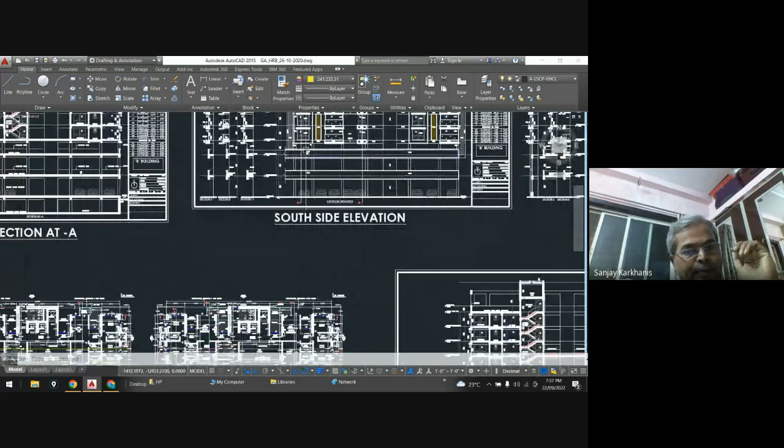Okay. Now the first thing is that we have to find out this zero. Now these are sections with respect to this. You can check over here. So this is section 1-1. So if you cut the section of the building and want to see, you can see this is section 1. So whatever is in this section will appear over here, right? Now let us see that in the window.

Let's see in this window, which is marked as W1. You will see 0.00, and if you see this, this small band is minus 1.5. That means it is away from you, up to a distance of 1.5. And if you see this chajja marked over here, it is plus 0.45. That means it is towards you. So anything plus is towards you, and anything minus will be away from you with respect to this 0 0 line. Clear?

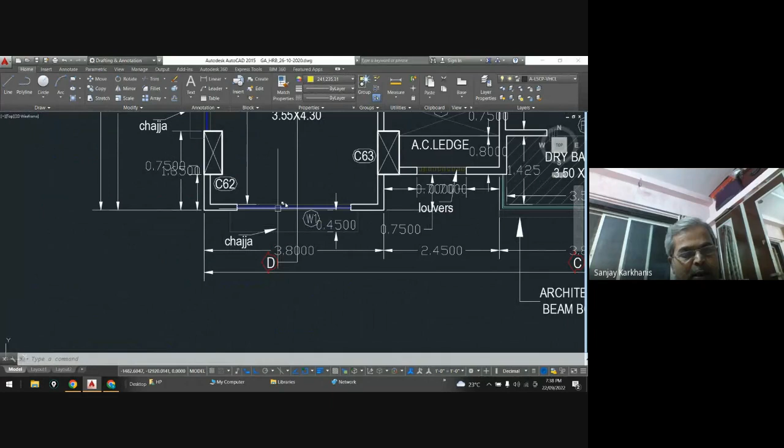Now nothing is mentioned over here; it's not actually written. So you can see that this is the 0 0 line. So what you have to do, you have to go to this W1. Okay, you can see that this is W1. Then I will draw a line like this. Got it? That means this yellow line will indicate the 0 level because it is at W1. Then this chajja.

So in plan, this chajja has a dimension like this, and if you measure the length of the chajja, it is something like 2700. One minute, I'm having a little bit of trouble. Just wait one minute.

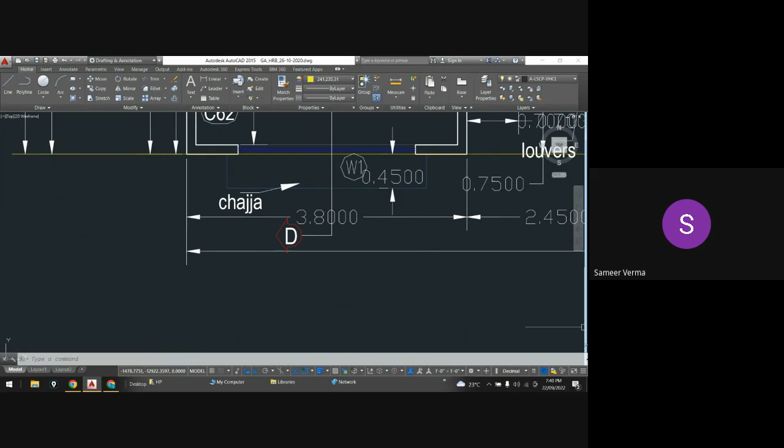Okay, so I'm coming back. So this much is the length, 2700. That means 2.7, and then I will try to see the elevation, and let's see over here. Yeah, actually, sir, the drawing is not that clear, that is why I am discussing. Is it visible now? Yes, it's visible now. Don't worry, I will use it.

You can see this is your chajja. So I will try to see whether the dimension on the plan and dimension on the elevation matches. So you can see it is matching, right? Yes sir. That means this is the chajja, which is having 2.7 meter as its length. That means offset from this window, maybe 150 on right side, 150 on left side. Then this will be thickness of the chajja, or height of the chajja slab, and it will be projecting towards you with 0.45.

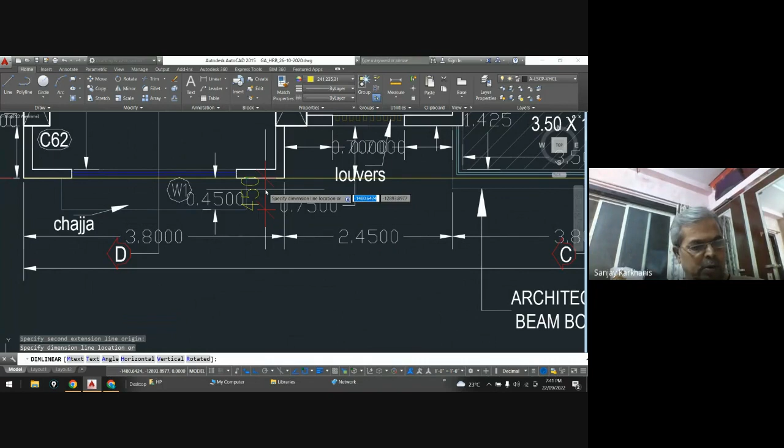And the same thing you can get in the drawing also. Let's see, you can check it over here. So if I measure this length, it is 450, right? Yes sir. So this is how you can find out the relation. Now one thing is confirmed, that whatever zero line he is saying and we are saying is one and the same. And then we'll start reading the elevation. And if we do not get enough information from the elevation, we'll try to see the section, let's say section 1. So section 1 is shown over here.

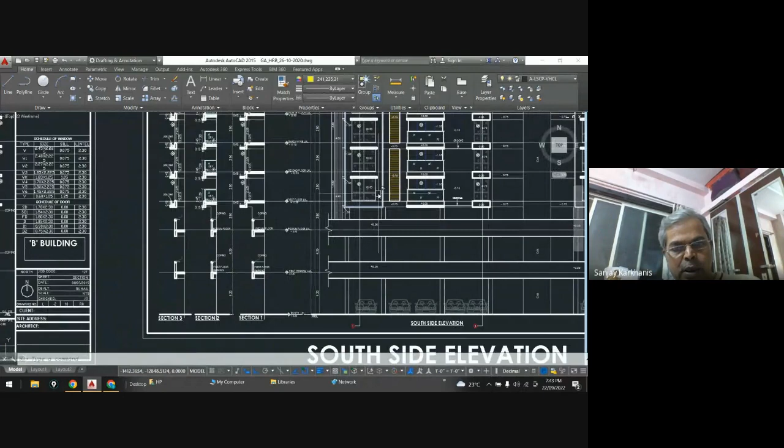And then if you come to this podium, this is the level, right? So you can see that this is the window and this is the projection 0.45. So if I look from this direction, that means the south direction, I will get 0.45 plus, right? Clear? Yes sir. So along with the section and the elevation, you will see that this box is at the zero line. Then this box is towards you by 0.45, and this small box is minus 1.5.

So if I go back in the plan, I will try to measure that and find out what is that projection. So you can see this is your louvers line. So what I will call it is an opening and AC ledge. And if I look from this side, I will see these louvers. Then I will see this much distance. So that is the distance.

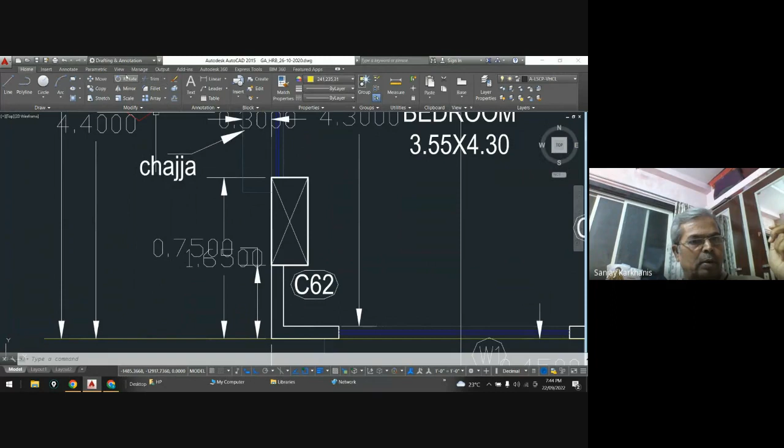So if I measure that from this line up to this point, you will see it is 3.8. That means that is not the line that he is showing. It is something around 1.5, so this is the line. Are you getting it? So if I measure that linearly from this point to this point, you can see 1.498. So there may be a little bit of error in my clicking the point. Okay, see 1.49, almost 1.5, right? And it is away from this yellow line, and that's why you see this projection, a chajja projection which is 1.5. Clear?

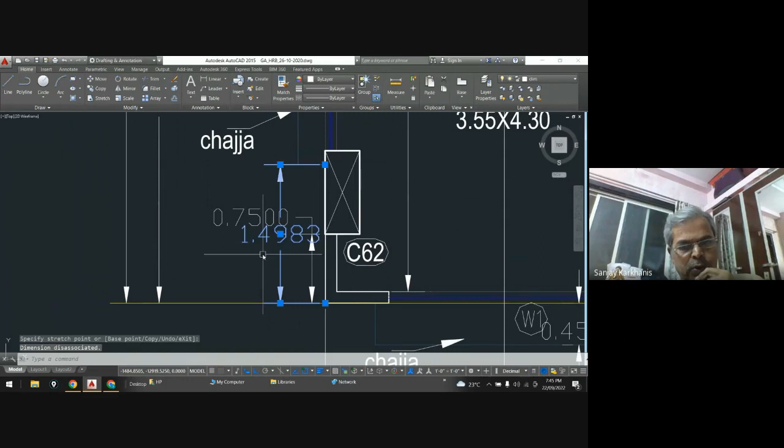Hello. Yes, sir. Or let's see, this is 1.85. If I draw this line on this point, you can see 1.4983. So that's a dimensional measurement mistake, maybe. So it is actually 1.5. Okay. Let me draw it. Clear? Yes, sir.

Then I will see this louver, and then I will see this band, and the same thing you can check in the elevation. Where is that elevation? Okay, so here we are. See, this is minus 1.5. So for first floor, it is minus 1.5, then this louver, and then this width. So now you can understand what this is. So these are the louvers. This is the chajja projection that is away from the 0,0 line at minus 1.5. And this was that projection 3.8. Clear?

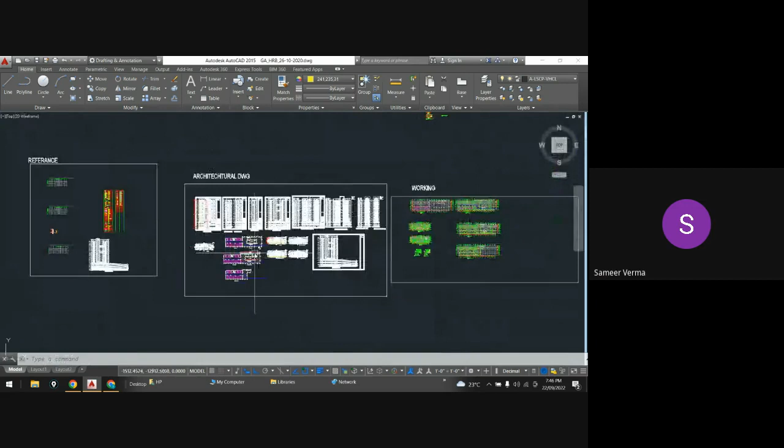Clear, sir. Yeah, you can check it over here also. We have measured that. So it was this distance, up to this. This was the 3.8 meter. Okay.

And in this region, I can see only that, because whatever is back, I cannot see it from this south side. Similarly, you can check this thing. Now here also there are louvers, then this is a column.

So if you check the projection for that, it is 0.75. Then louvers, and then this will be a 0,0 line, and then you will see architectural projection for beam bottom. So this is the architectural projection at beam bottom, and you can verify it in the elevation also. See, after this window, you can see this.

So these louvers are at minus 75 or 750mm, or 0.75 from the 0,0 line. Then this projection, if you see this projection, so again this projection will be 0. So anything not mentioned must be a 0,0 projection. Okay, clear? So this is the column part that you see in the plan.

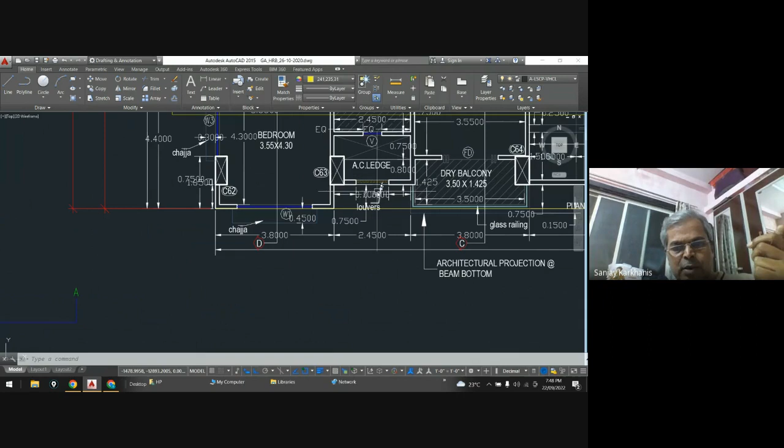See, so this is the column part. You can check it this much. So total distance you can check, then louvers, size of the louvers, and then if you come to this dry balcony, again from this 0,0 line, now you must see the grill, that glass railing that the architect has proposed.

So this is the glass railing, right? And then there will be a folded door that you can see from this side. And if you have any doubt, then again he has shown you a section, that is cutting a section line CC. So you can check it in section CC also, or in section C, or you can check it in elevation also. You can see that this is a two line.

So section 3, then similarly there will be a section 2 also, because section 1, section 2, and section 3. So this way you can read the entire drawing. You can check it over here. So this is the glass railing, and you can check that below, at the beam bottom, you are having a 0.15 as a bottom chajja. Clear?

Yes, sir. And then you see a part of the folding door, that means this is your dry balcony area, and inside it is 1.55. Then again you can cross check whether whatever you are reading is matching with this.

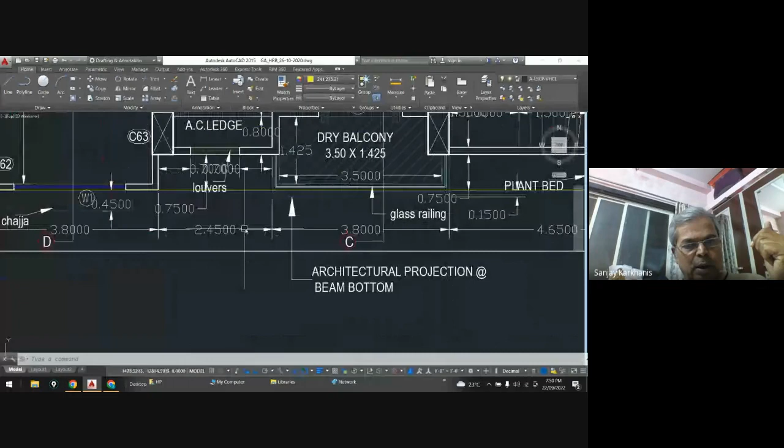Now you can see here. So this is my 0,0 line. Then this is the bottom chajja, which is 0.15. So I can measure and see that it is 0.15. And then from the 0 line I can see the distance of the folding door. So this is the width of the folding door, and this I will see as a brick or BB masonry.

And if I check the distance, it is 1.55. So in elevation you must get it as minus 1.55. So whether you are getting it or not, you can check it. So you can check it over here. So this much part is inside, okay, or away from you at a distance of 1.55. Clear?

Yes sir. So similarly, you can see at every floor, and then you will understand the entire floor elevation up to every floor level, because every floor level you will see the same thing. So 0.15 chajja below the dry balcony, then this is the 0,0 line. Then again there is a glass railing, then folding door at minus 1.55, and then you can see at minus 750, this is your louvers area, okay, and this will be a 0,0 line.

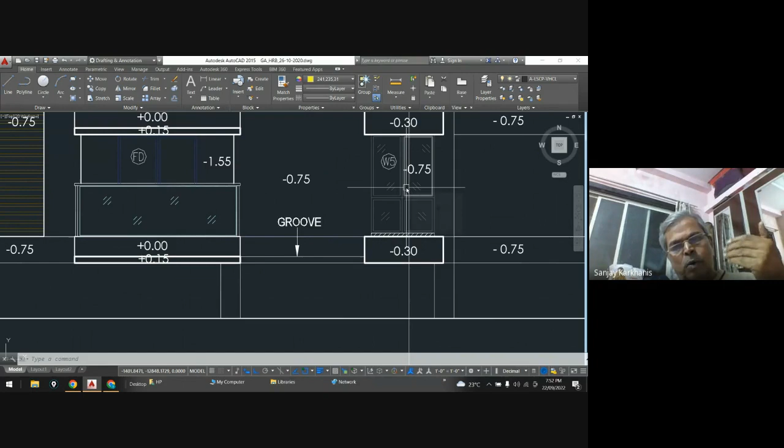Clear, sir. Now let us move to this. So folding door has been understood. Then you can see a groove has been created, and then you are having a window 5, which is away from that 0,0 line at a distance of 0.75 meters, and below you will have this projection as minus 0.30, meaning inside that.

Now check it in the elevation. So this is that distance. So this is your W. Where is the W5? Okay. This is a W6, and this is your line.

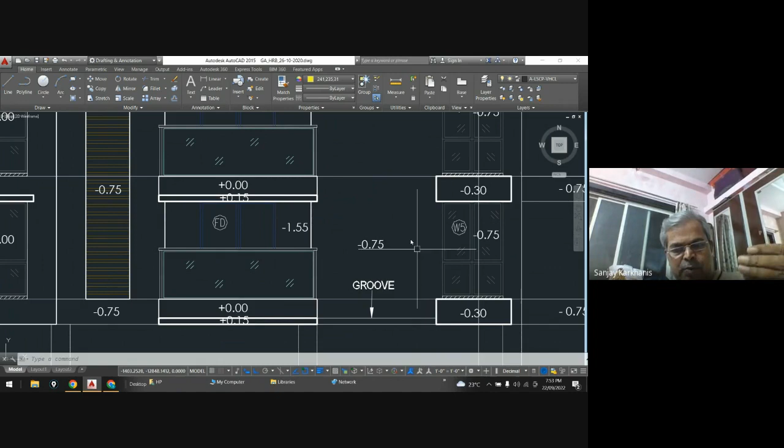You can see that minus 75, because from the 0,0 line the staircase is inside, and this is W6. While he is showing, what is showing here? W5. Actually, this should be W6, because some minor corrections may be there, and then this is minus 30. That means minus 30 and minus 75, so from this line it is towards you at 0.45.

Clear? So the same thing you can check in your plan, and you can see this 0.45. So this was the chajja. So here in plan he is saying W6, but in elevation he is saying W5. That may be some mismatch, and you can find out, right?

Okay, if I measure this much distance, it should be 0.3. Let me just check it. I'm measuring it from this point to this point, and it is 300. So that means whatever elevation you see over here is correct.

See, this is minus 0.75. From minus 0.75, it is minus 0.3. That means plus 45 from this line, W5. Or you may say from 0, 0, it is minus 30. Clear?

Yes, sir. And then you can see this additional part, so this is your column. You're having a column over here, and this is at minus 75, and the same is the column, and you can check that area.

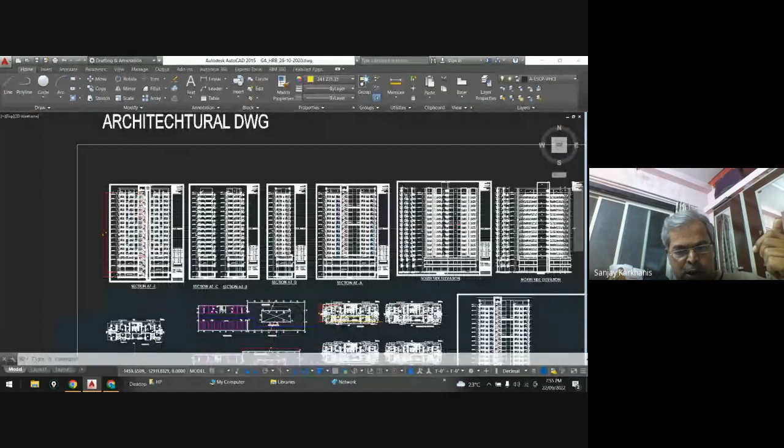So in plan also you can go and see. This is that C66 column, and this is from the yellow line. It is at a distance of 0.75 meters. You can check it over here. The measurement is also shown, and if it is not shown, you can measure it, so that your idea about the sections will get clear.

Now you can see again W1, and 0.45 is the projection of the Chajja. So this will be 0.45, W1, which is at 0,0, and that is a bedroom, and you can check it in elevation. So south side elevation. So we are here.

You can check that this is 0, 0. Then this portion is 0.45. So from 0, 0, you are inside. Then this is also a 0, 0 line, and you can check that inside it is 0.75 in minus direction, and then it is repeated. So whatever is over here, the same thing is over here. Clear?

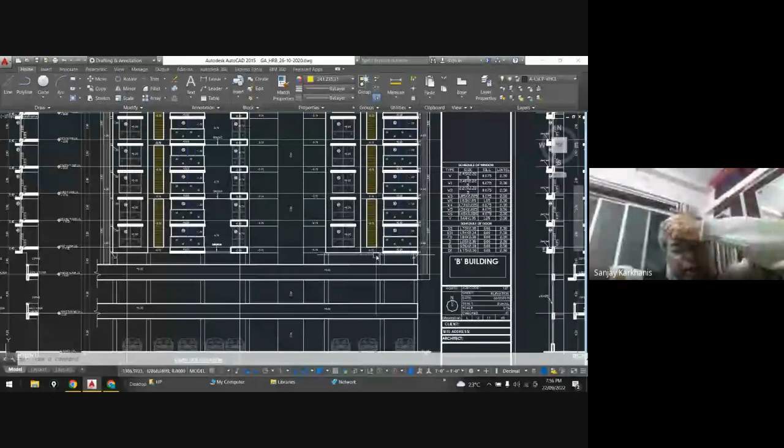Yes, sir, have you understood the south side elevation? Yes, sir. And then you can check the refuge area at that proper floor.

If you go to this floor level plan, you will see a refuge area which is at this much, and this is the height for the refuge area. He is creating something, maybe a railing or maybe BB masonry, whatever in plan.

So in refuge area, you can check it. This is that refuge area, and that refuge area is away from the 0, 0 line. Now you can see that the 0, 0 line you are having at this level. So away from that is 0.75. Then you can check this and everything. So this is how you can check a south side elevation.

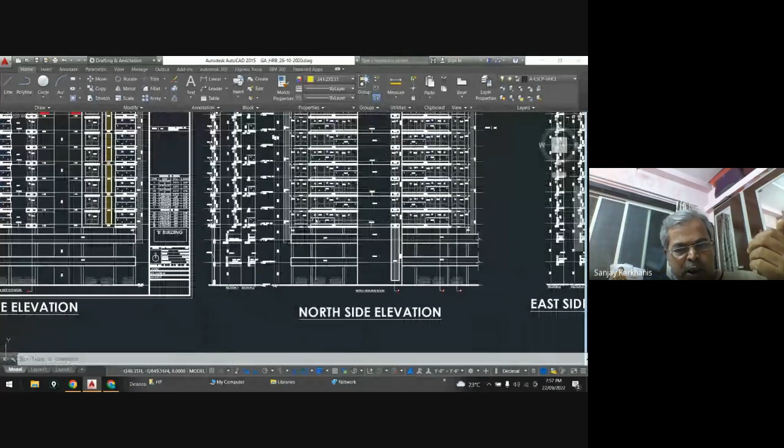Now try to see another elevation, let's say we'll go to the north side. Now north side, just have a look over here, and you will find it a little bit complicated. But if you go one by one, you will understand. The first thing is that you have to find out which one is the 0, 0 line.

Okay, so I can check it over here. Let's say this is the W, so this is W5, then this is a sliding door, then this is W2. So all these lines are at 0, 0. So I will go to the north side, that means opposite of south. So I will check it over here and try to find out.

Okay, so you can see that this is your W6, then this is 0.75. Then you can mark the 0, 0 line as this line. Okay, so I will say that the 0, 0 line will be something from this line.

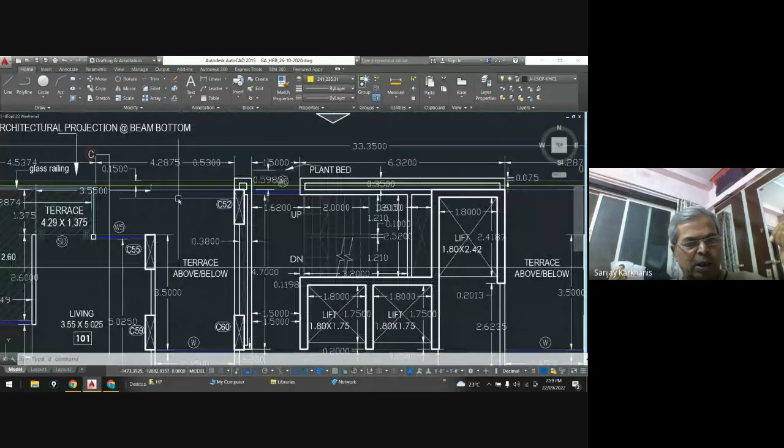If you see whatever dimensions you are getting, if it is not matching with that, then you have to check whether your zero zero line is correct or not. Now I have just drawn a line, as according to me this should be a zero zero line.

And now if I look from this side over here, let's say this is W1, and if I check the dimension, it has to be 1.5 something, and then this will be 0, 0. That means this portion will be plus 1.5. Clear?

Yes. See, now I'm looking from this side, so anything plus will be towards me and anything minus will be away from me. See, he has shown how you should see the north side. So if you are standing over here and you are looking at the building, you will see this.

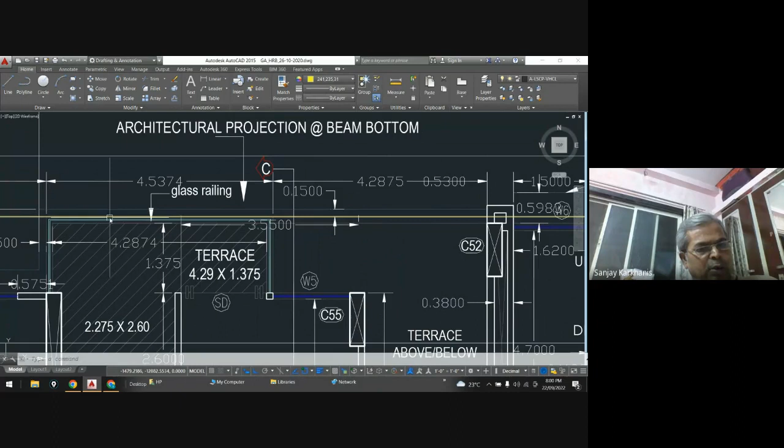Now the first thing is to check this much distance so that your zero zero line will get confirmed, or you can check this railing also. So according to this plan, and whatever that yellow line that you are defining, this is the terrace level, and that glass railing should be at 0, 0.

So just check in the north side elevation, so south side elevation, and this is my north side elevation. And you can see this, where is that? Yes, W1 is at 0, 0.

Then this will be 0.45, and after that this has to be 0.75, and this distance, you're not getting yet clear, north side elevation. Okay, from 0, 0 you can see this portion, which is a portion of the staircase, is 1.725. Okay, so check in the plan.

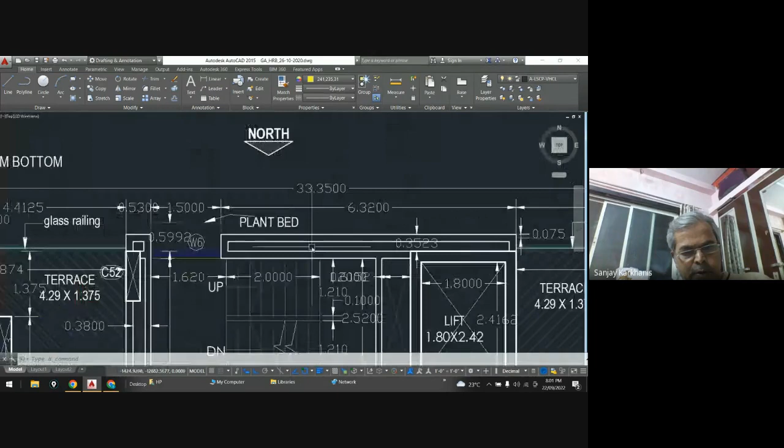So this is the portion. Okay, and if I see this portion, it has to be at 1.725.

Actually it is coming out to be 1.65. That means your portion is somewhere here. Yes, 1.725. That is, Yes, sir. So that means your 0-0 line is not at this.

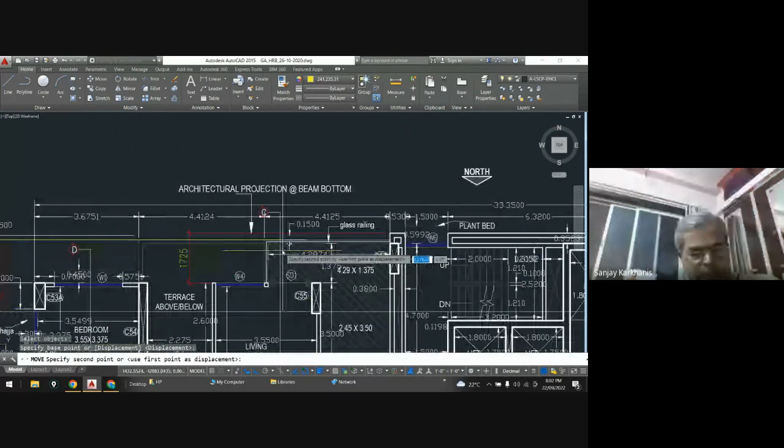It is a 0-0 line. Let me move the 0-0 line with this up to say this. So that will be my 0-0 line.

Clear? Clear, sir. See W4 and W1 are inside at a distance of 1.725. That means this is my 0-0 line. Yes.

Move the line. Move the line up to this. This is my 0-0 line. Clear? Yes, sir. That means this sliding door must be at 0-0.

Then it will be plus 1.725. What he has written? Sir, yeah, one plus. Yes. You can see here plus 1.725, right? Yes, sir. So accordingly, now you can get the relevant drawing.

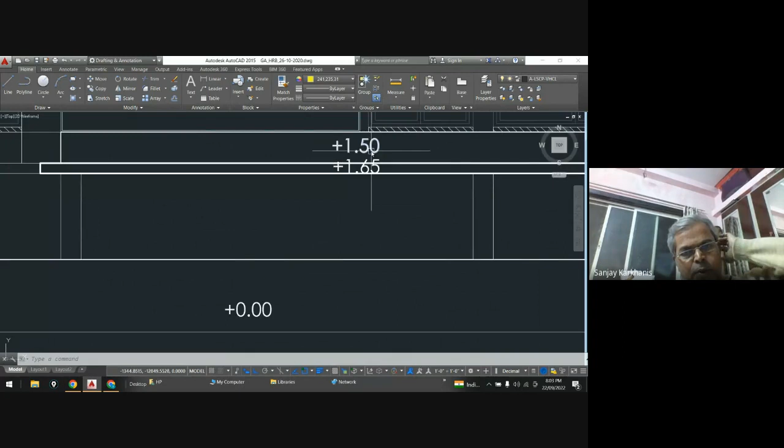See, it is 1.5, then 1.65. So now you can get it from this 0-0 line. So again, you can check it over here that sliding and W2 are all at 0-0. And you are having this grill portion as 1.5, and similarly this also 1.5 and this as 1.65. Now you can see that over here.

So from this, this is your grill part, which you can check it at 1.5, right? Yes, clear. Yes, sir. Yes, sir. So this is how you will visualize the entire thing, and then you can check this W2 also, which is

at 2.6 inside, that means minus 2.6, and that you can check it over here. So it has to be 2.6. This line, where is that? See this minus 2.6. Yes, and that's why this is L type.

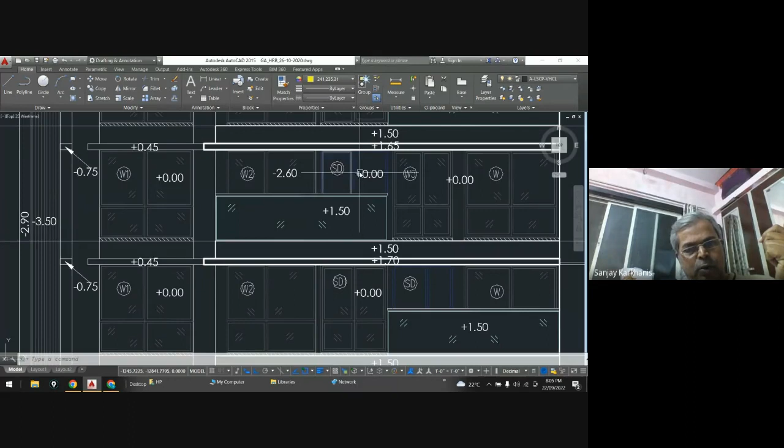So the sliding door, and this is minus. That means you can check it over here. So where is that sliding door? So this is a sliding door, and this W2. So W4 and W2 are away from each other at a distance of 2.6. Clear?

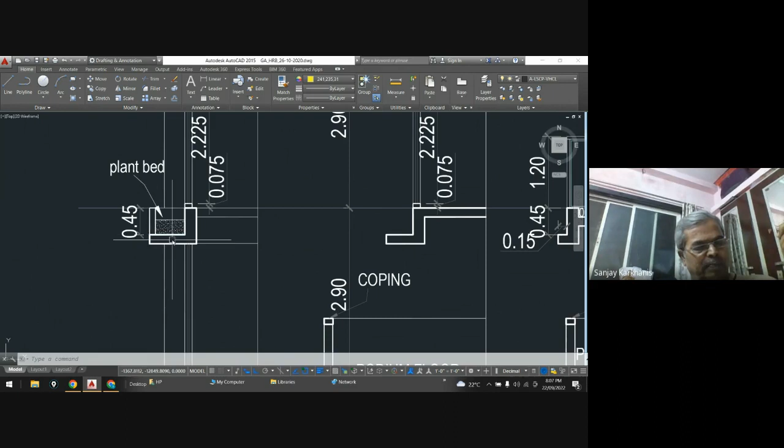And then once the architectural features are missed from your RC drawing, then those drawings, whether they are technically correct from a strength point of view, they are of no use to a client. Are you getting that point?

Yes sir. Because many times we are mostly talking about bending moment, shear force, torsional force, flexural moment, torsional moment, deflection criteria, but we are not paying enough attention to create the architectural features.

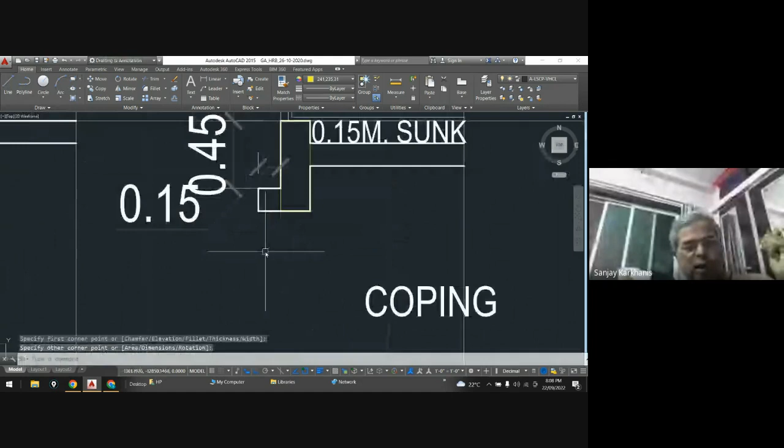And then your drawing may be technically very best, but for the client it is of no use, because let's say if I create a beam like this, and this concreting at this floor has been completed, and later on

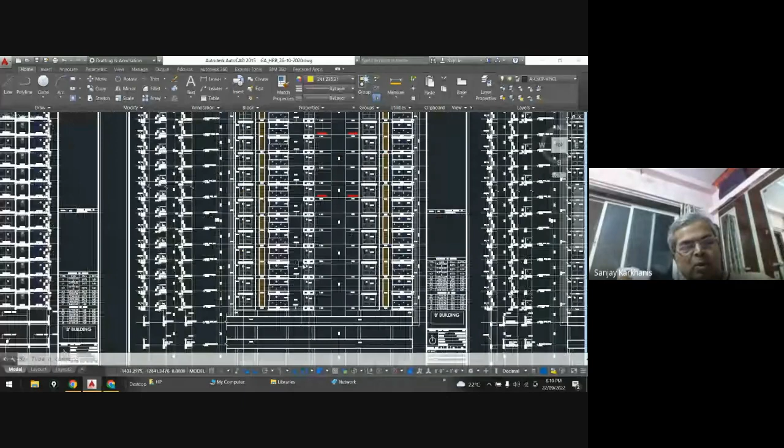Otherwise, the elegance or beauty of the structure will be hampered. It has nothing to do with architectural, but these are very important points on which I have found many structure engineers do not focus. And later on, the blame game starts.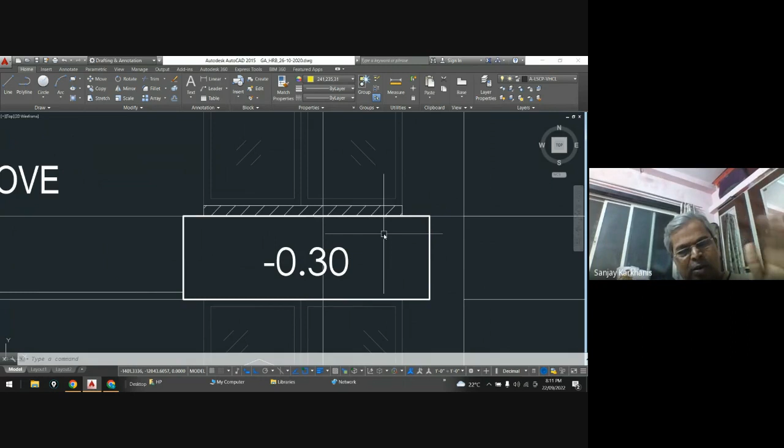How will you add these projections once your floor level concreting is completed? Yes, sir. तो फिर वो वापस शुरू होता है ना, repairing and all that, but that looks ugly, and that is a sign of not having a concentration on your project, and that is very important. And once you become a master of this, then you will be at your top level.

So these are the things you have to take into consideration. Right in the beginning of creating your GA drawings, you will see that everywhere we have provided that. In our GA drawing, we have provided all that. You can check it anywhere. Or there may be some issues where you may not create proper GA, then you have to address it with your architect and get it corrected from your angle, or you correct your drawings as per the architectural angle, right?

In GA drawing, everywhere we have provided all those features that the architect wants, right in the beginning. At the time of concreting, it will be taken care of, so the site person does not have to superimpose your drawing on the architectural drawing and go ahead with that. They are not of that type of excellency.

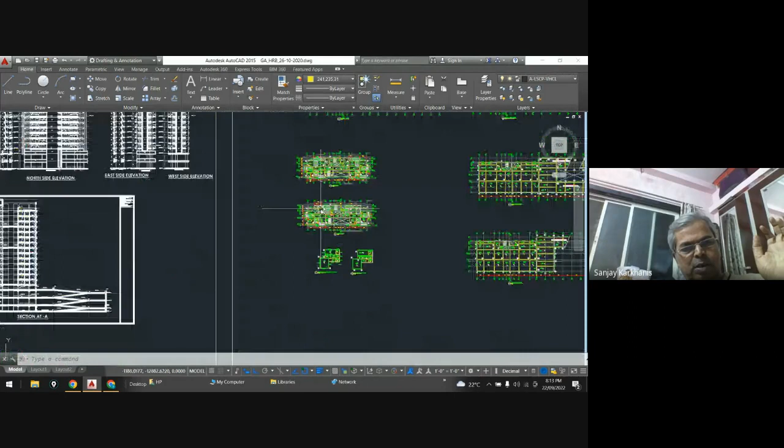That's why understanding the architectural features is a very important part before creating your structure. And now here you will see that the depth of the beam is finalized. You can take 1 or 2 days to understand every feature of the architectural drawing. And even if you do not understand anything in it, you can ask the architect to explain, भैया ये तो मेरे समझ में नहीं आया, आप बता सकते हैं. He will definitely guide you.

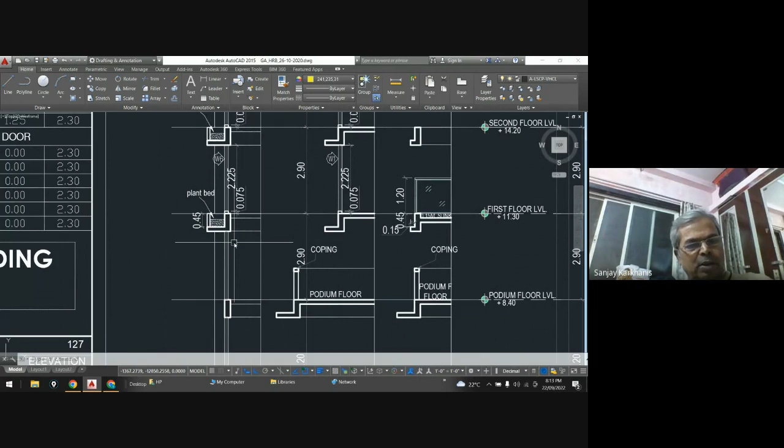And now I will leave you to read the east side and west side elevation. The same way, you have to draw the 0 0 line, and with respect to that 0 0 line you have to see whether you get all these features properly or not. Just have a look. You can see here, this is a feature, and this is that part which is 1.35 towards you from the 0 0 line.

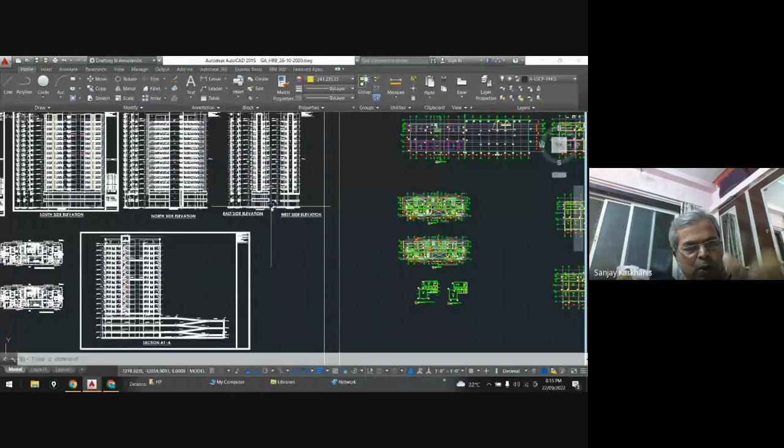You can see the 0 0 line stands at the window, and most of the time the window level or line in plan which shows the window is considered as the 0 0 line. Now you can see this is the portion, this is the architectural elevation, and even with this small width the architect has created a very beautiful looking elevation.

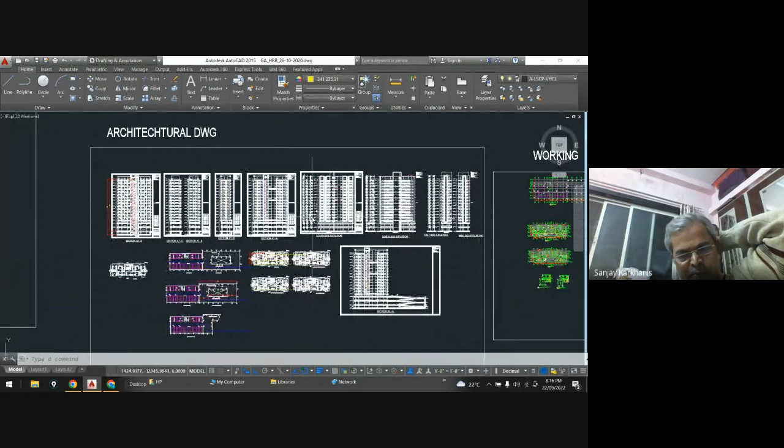Yes, sir. Yeah. So this way you have to go through the architectural drawings. I will mail all this after finishing the session, within 15 minutes. So all these drawings, and don't look into this. This is the thing that has been used for creating the GA drawings. This is a legend, or you may have it for your practice. So all these are the GA drawings.

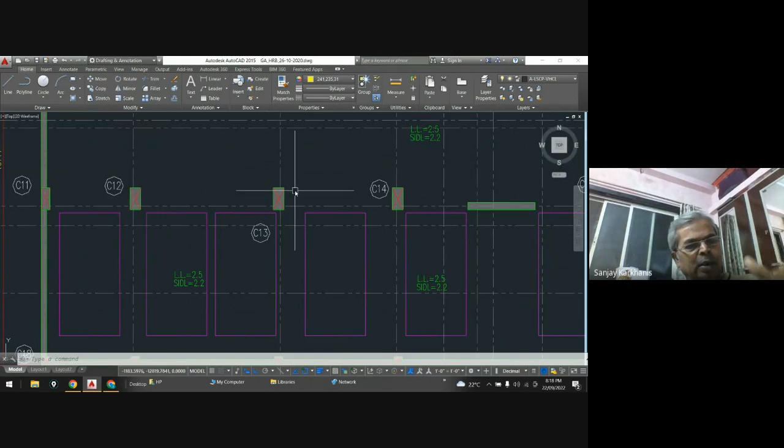Now, after finishing with architectural details and everything, you will create GA drawings, and then your actual work will start. What will be the work later on? Creating the grid lines, then providing the locations of the columns, then you may measure the size of columns and provide it, or you may provide any size and go ahead with your analysis, and based on your analysis results, finally you have to choose these sizes and rectify your model.

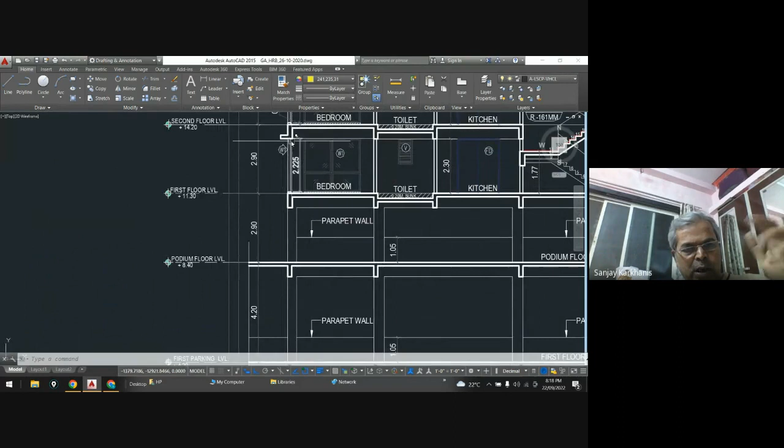But before that, it is very important how you will provide. Now we are not providing anything for this region, which is called a podium, or this is for going to different levels. So you may exclude this part, and you may create the entire model with the help of this. And these are the floor to floor heights. Then you can find out the height of the window. Based on that, you can find out the loading.

Now we have also prepared a loading standard. Right in the beginning, you can see we have placed how much SDL, live load, etc. you should apply on the various floors. All these yellow lines indicate the size of beam, and the depth of the beam you can find out from the elevation. And here we have written for your help the SDL or SIDL and live load, etc. Everywhere we have written, but we have prepared a detailed input DBR. So with respect to this, we'll try to read the input DBR, and that will also help you a lot.

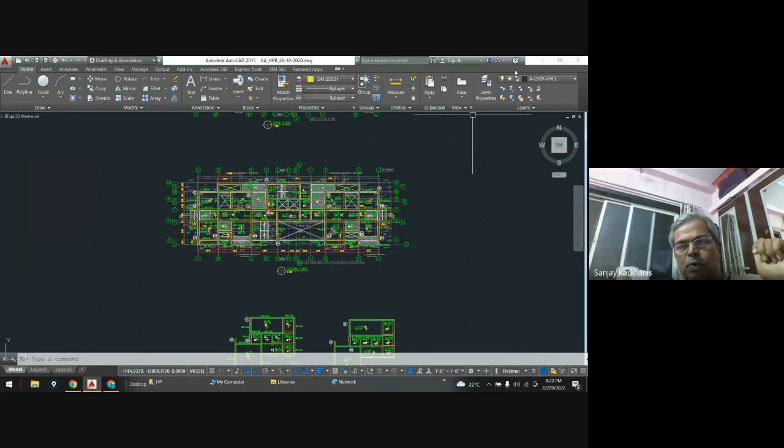Now I will minimize this and we'll go to that input DBR. That input DBR also I will share with you. Let's see that input DBR. So I will go to my platform, then HRB data. So this is the HRB DBR document, and I will click on it. Now you can see 1 of 49. I think I have shown you this, but we have not discussed it. Have I shown you this? Hello? Yes. But we have not discussed it.

Yeah, I have just shown you that this is a standard pro forma that any private consultant's office must have in a format, so that whether you are working on that project or someone else is working simultaneously, or there is a team of engineers, one doing one thing, another doing another thing, there has to be some consistency. And for that, everybody will take help of this input DBR. That's why I say this input DBR is for your company or your consultancy.

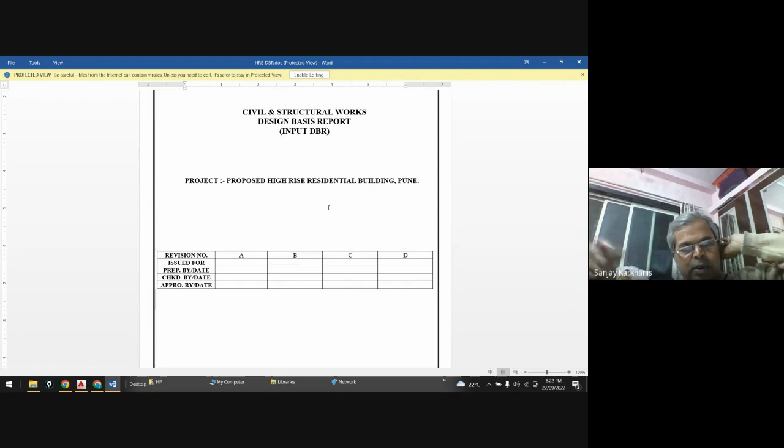Maybe your consultancy may be run single-handedly, or there may be a number of structural engineers. But many times what happens, I will consider SDL as 1.5, while someone else will consider SDL as 1.75, and a third one will say that no, actually SDL has to be 1.25. So there will always be a difference.

So we should not have that difference, and that's why this will be a standard practice. And with the help of this DBR, you will say that whatever ETABS model you are creating, this is your base, and that's why it is called a design basis report.

Okay. Hello. Yes, sir. Yes, sir.

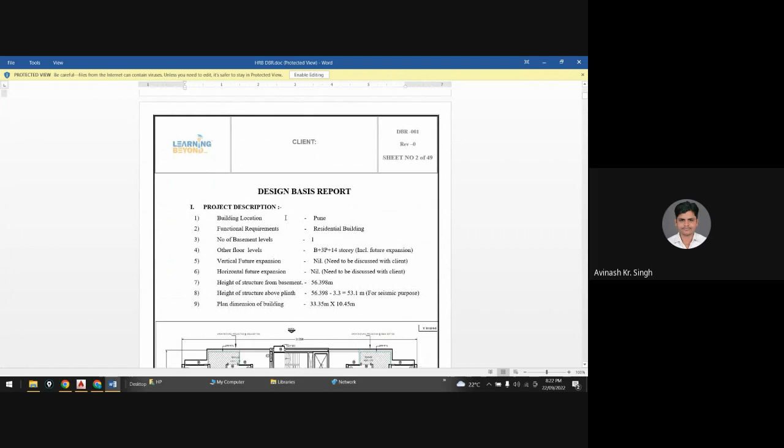Now this format will also be given to you, and you can have a Xerox copy of this. The PDF format will be given to you, and you can print it and use it for any other project. The format will be the same, only the dimensions or magnitudes will change. Let's start with that and understand the DBR process.

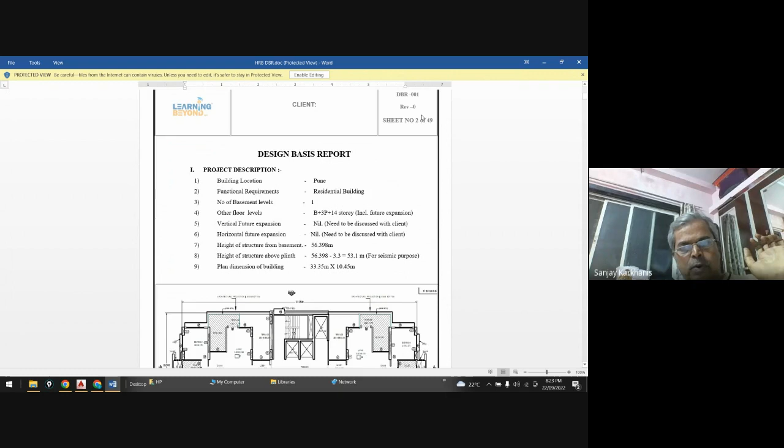So this is a design basis report, sheet number 2. There are 49 total sheets, and you can see in first number you have a project description. Whatever project you are carrying out, a general description of that project you can write here. Building location, this is the place where the building is located. You may have whatever place you have.

Then functional requirement. What are the functional requirements? The building may be commercial, residential, or mixed use. So there may be a hotel at first floor, offices on second, third, fourth, and then residential. So all that you can provide here. Mixed use building, or commercial building. Right now this is a residential building, so we are saying residential building.

How many basements are there? There may be one, two, three. Right now we have only one basement. Then other floor levels. How many other floors are there? So basement plus three parking plus 14 stories above, including future expansion.

Now, many times the building you are creating will depend on the funds available with the construction company or the owner of the project. Depending on that, he may say that actually I have a plan to create 14 stories, and after that I might create two more stories. So based on that, you have to put it here.

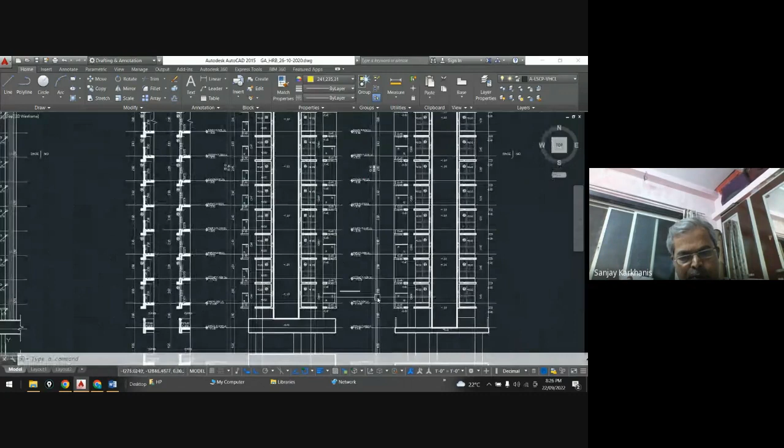So zero is starting at this. You can check the plinth level. Actually, it's not. Is it a plinth level? It has to be. It is to be checked in the sections. So okay, again, this is a mistake. Actually, this zero is at this, and this is that. Let me make it. So this is here, and this is here.

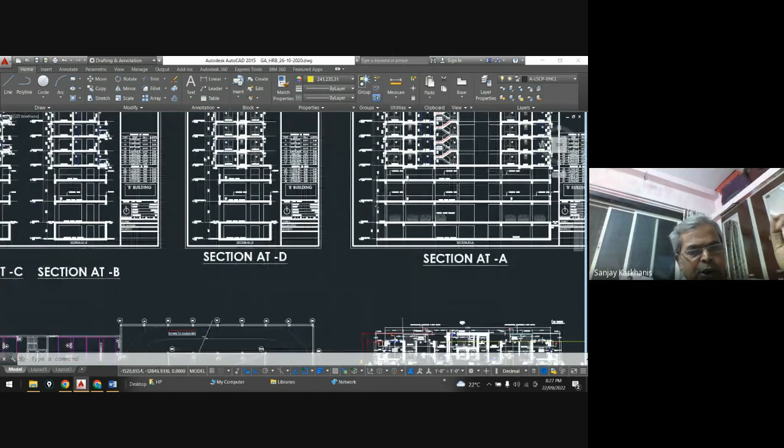Yes, sir. Okay, so let me save it. So this is your 0, 0, which is ground level, and below ground level you have a basement at 3.3. That's why this will be minus 3.3, and then from this will be 4.2. Then 4.2 plus 4.2 will be 8.4. Accordingly, you can check and have the information here, right?

Then height of the structure above plinth, then plan dimensions. You can read the plan dimensions. This is your width and this is your length. The entire length from outer column to outer column. So you can write that: 33.35 by 10.45.

Then you may have a sample picture there for understanding. A typical floor has been shown here. That is the first floor, right? Then now, what type of construction are you going to use?

So the basic material chosen for the structural element in the building is reinforced concrete. If it is PT, then you can say PT. If it is flat slab, then you can say reinforced flat slab with column capitals, etc., whatever. So the description may change, but this second column is for what type of construction you are going to use. Then the building is proposed to be designed as reinforced concrete.

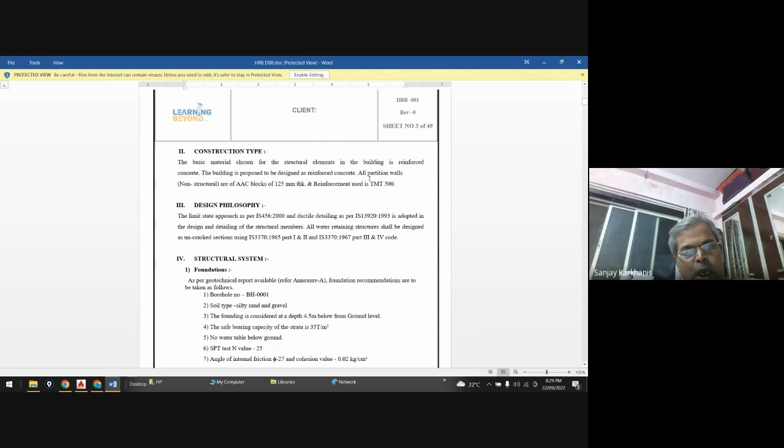All partition walls which are non-structural are of AAC blocks. So these are, what I will say, lightweight density blocks. So internal partition walls are considered as 125 thick AAC blocks, and reinforcement that is used is TMT 500. Okay, then this is about design philosophy. So you are going to use a limit state approach.

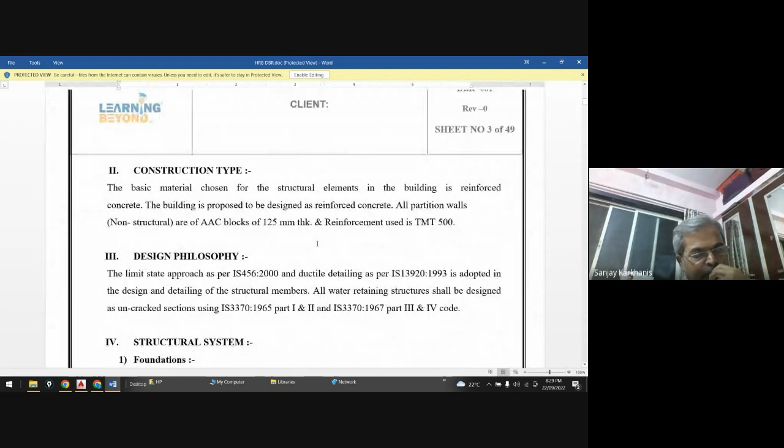Can you see this, or let me increase it? Now you might be able to see this. Yes. Hello. Yes, sir.

So this is a limit state approach as per IS 456 2000, with ductile detailing as per 13920. Now instead of 1993, if you are having a higher version, you can change it a little; when we constructed this, it was 1993. Design and detailing of the structural elements has been carried out as per IS 456 2000 and 13920. Then water retaining structures shall be designed as uncracked sections using IS 3370 parts 1, 2, 3 and 4.

Now, what type of structure system have you suggested? Then the foundation, then the geotechnical report. Whenever you are going for high-rise structures, you must go for a geotechnical report. If you are going to investigate the soil or the supporting ground, you have to go for a geotechnical report, and a geotechnical consultant, or foundation consultant, will come into the picture and give a quotation to the client, which might be around 60-70,000.

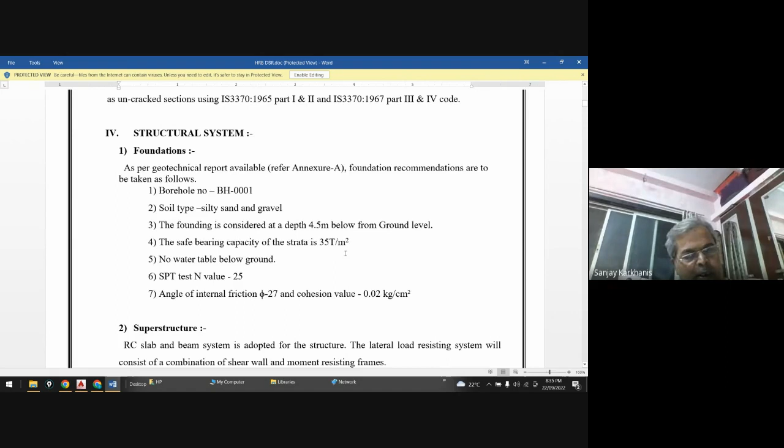And that's why initially we asked the foundation consultant to at least give us the depth, whatever is available, and the SBC of that area. So he has given that. And this will not at all be your responsibility. Ask the client to go for investigation and get the report, right? So that has been mentioned

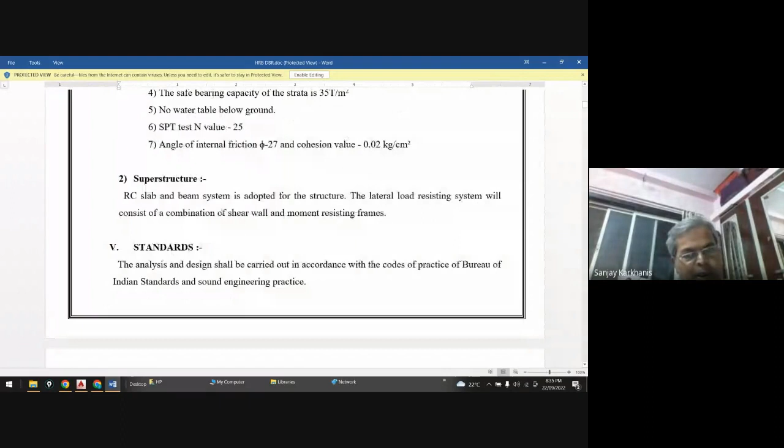over here. So if the bearing capacity at that level doesn't come out to be 35, then it is not your fault. Then the superstructure: an RC slab and beam system is adopted. The lateral load resisting system will consist of a combination of shear walls and moment resisting frames. And then about the standards, you can check them over here.

And now design criteria. So here you will see dead load. Dead load shall generally be determined in accordance with IS 875 Part 1. Dead load will be calculated using ETABS with appropriate unit weights of material. All loads mentioned below are working loads. And now this is your calculation. So you are going for superimposed loads.

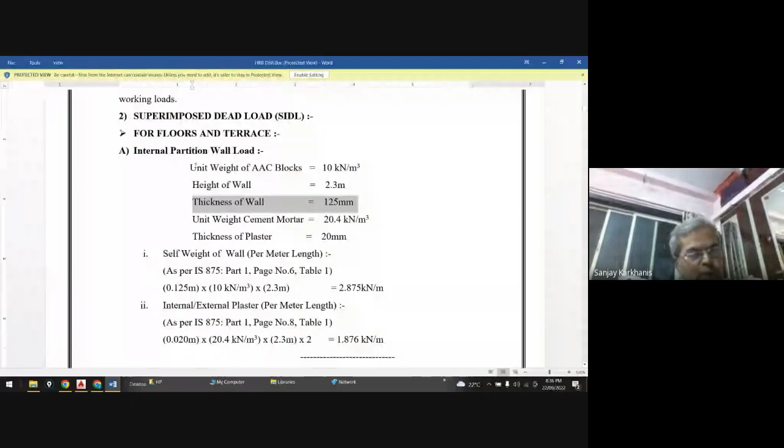Now from this onwards, your actual work will start. So first we are going to find out the SDL for floors and terrace, and how you can check it. The internal partition wall load. So the unit weight of AAC blocks is 10 kilonewton per cubic meter. Again, this has been given by the manufacturer, because you won't find this in IS 875.

Because the client was interested in reducing the dead load, we advised him to go for lightweight density blocks instead of normal brick masonry, which has 20 kilonewton per cubic meter as its unit weight. Okay, then height of wall. 1 minute.

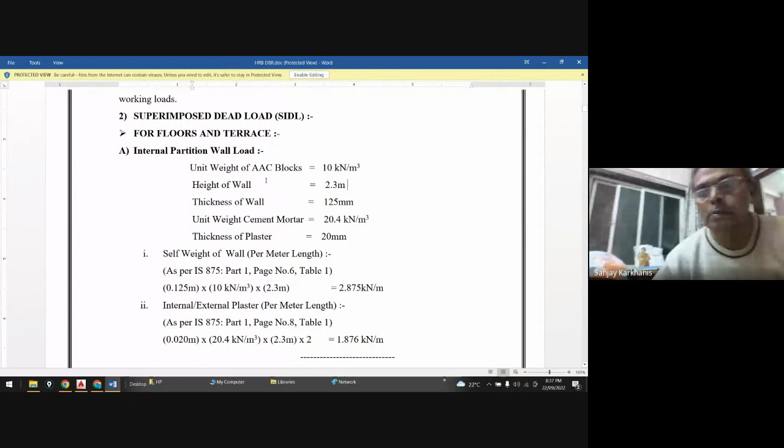Okay, so you can see the height of wall. How will you calculate the height of wall? Based on this. Got it? Yes, sir. So that you can check, because I will not go ahead with that. So floor to floor height minus the depth of the beam that you are considering. So that is coming out to be 2.3.

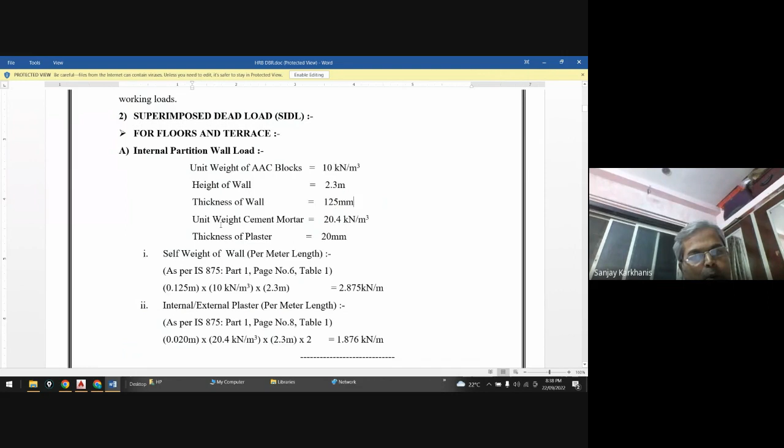Then thickness of wall, again, you can read from your architectural drawing, and we are using 125 mm thickness for internal walls, so partition walls. Then unit weight of cement mortar, that you can get from IS 875. Then thickness of plaster. This is your normal understanding: 15 to 20 mm thickness of plaster. That is inside plaster. Now, based on this, you will calculate the self weight of wall.

Now you know that. So, is it required to show how to find it out? I think we have covered all this. Yes, sir, we have covered it. So 0.125 multiplied by 10, which is the self weight, multiplied by height, will give you the weight of wall.

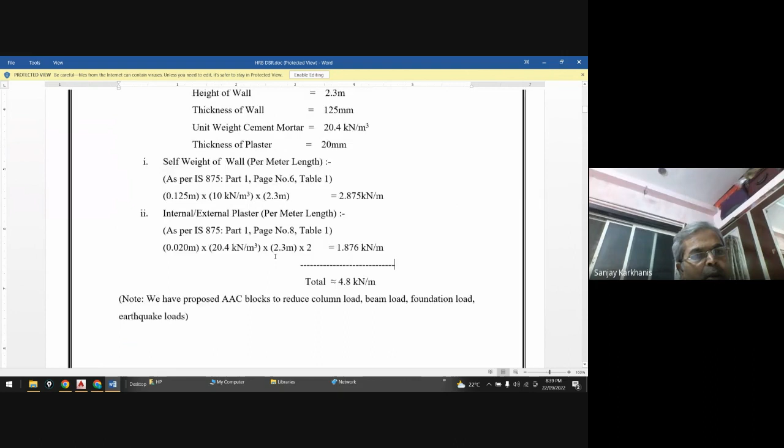Then internal and external plaster. So it is applied on both sides. So 0.02 multiplied by 20.4 multiplied by 2.3, which is the height, multiplied by 2. And this plus this will come out to a total equal to 4.8. Okay. So SDL, or superimposed dead load, with this partition wall is clear. So this is how it is calculated.

But if you put that on paper, that would be very easy, because later on, if anybody asks you on what basis you are saying that, you can say, sir, this is the calculation, and based on that, finally, you will say 4.8. And after this, you may go with 5 kilonewton per meter. That is up to you. But minimum 4.8 will be the internal wall UDL.

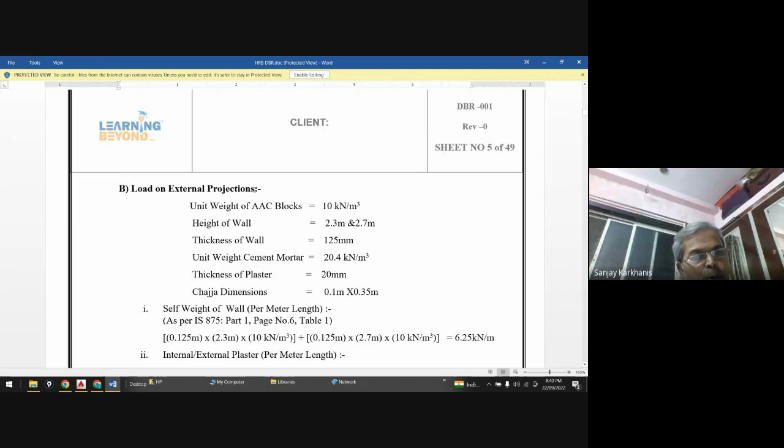Then what about load on external projections? Now, many times this is very important, because there may be external projections. You may check it over here. See, in this type, one wall is inside, one wall is outside. Then this is the top and bottom chajja. Then you can check it over here. So how many parts will there be?

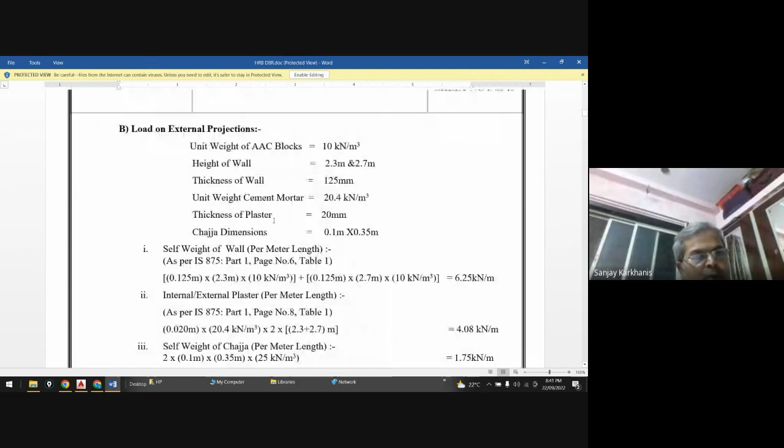Then you have to calculate weight of this chajja and weight of this chajja. You can check it over here. Height of wall is 2.3 inside, 2.7 outside, thickness of wall 125. Then thickness of plaster, then chajja dimensions, you can check in your architectural drawings. Also you are considering 0.1 meter by 0.35. So these are the plan dimensions of chajja.

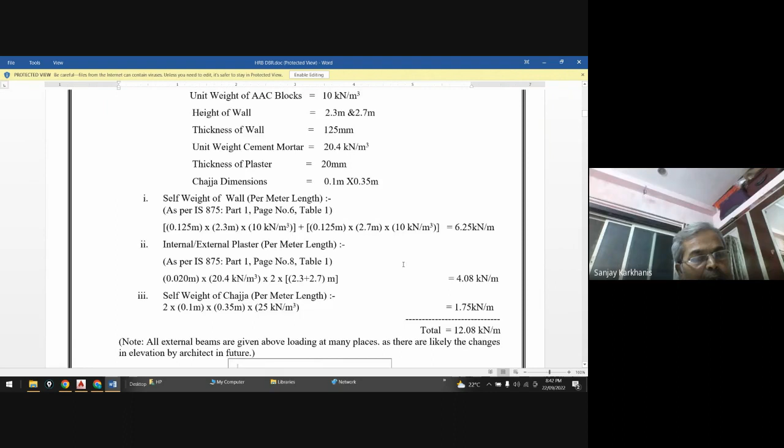Then self weight of wall, you can calculate now this. So self weight of both the walls, because this is the inside wall and this is outside wall. Total it is coming out to be 6.25. Then internal and external plaster you can calculate, so it is coming out to be 4.08.

And self weight of chajja - there will be a chajja at top and chajja at bottom, that's why 2 is written over here, and that is coming out to be 1.75.

Now I am not considering weight of the beam. Why? Because we are creating this in ETABS, and ETABS has the ability to calculate self weight of structure elements. Non-structure elements I am considering, yes.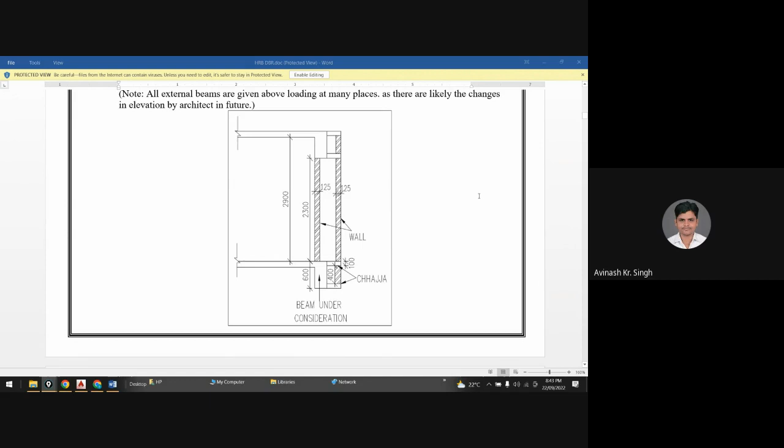Now you may ask me, sir, this slab is also a structural part of the entire building, but you are not modeling this. Are you modeling this? Hello? Yes, anybody? Hello, yes am I audible? Yes sir, yes. Are you going to model this in your ETABS model? No sir.

That means this is to be considered as part of SDL, yes sir. See, if you are going to model beam something like this,

then I don't have any problem, but you are not going to model beam like this, you are just going to model a beam like this. So this much self-weight will be taken care by the ETABS, but whatever is extra over here, then this one, then there will be a wall inside, there will be wall outside, so all that will be considered as SDL.

Right? Yes sir. Okay, so this way I think now you will start understanding things quite clearly. Yes or no? It's not boring, right? No sir. Is it boring? No sir, it's not boring.

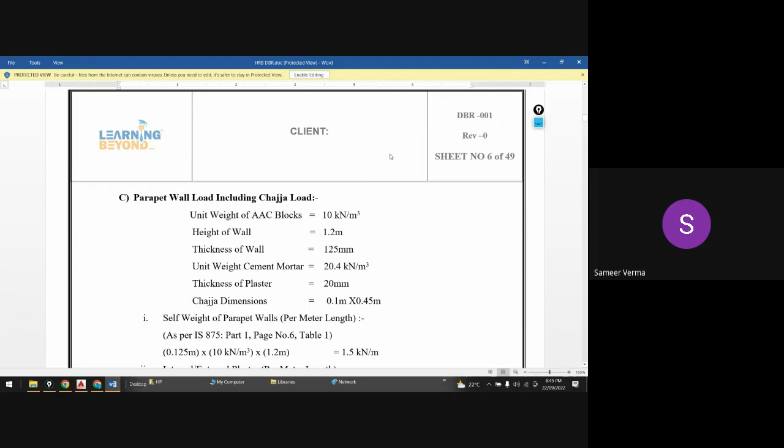No, what happens is this is all addition, alteration, subtraction and division. For this many times people might feel it boring, but actually this is very essential, because when you are going to apply SDL, you don't understand how to calculate SDL, and that's why we are providing this.

Actually we have taken a lot of stress to create this, and you can see that 49 pages are there. Out of that we are just covering 6, and I think we'll have to carry it in another session, but we'll do that, because there is no shortcut for learning.

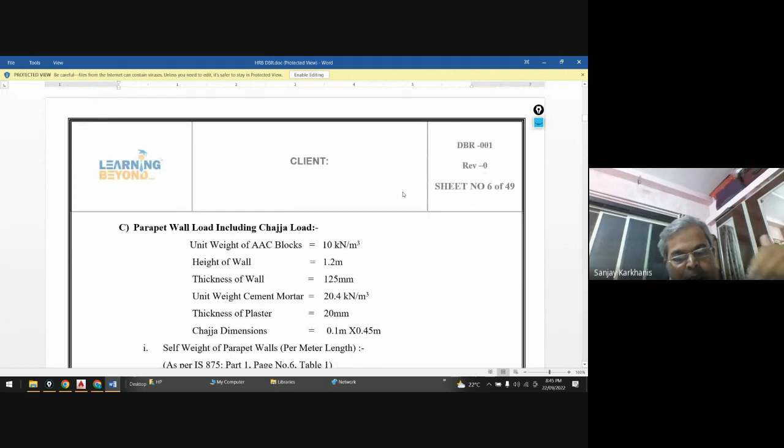Okay sir, yeah, okay, but right now shall we carry on, or is that enough for today? Enough for today sir, okay okay.

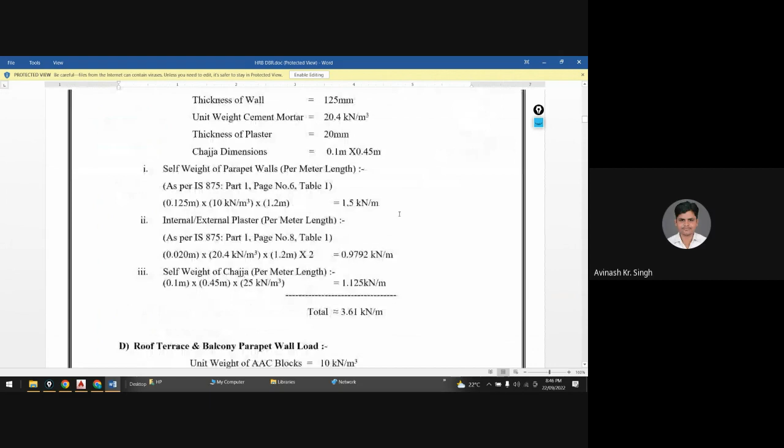So you can go through all that. Actually it's very simple, and we have taken every minute step we have written, that's why it is. If you go through this, you will understand each and everything.

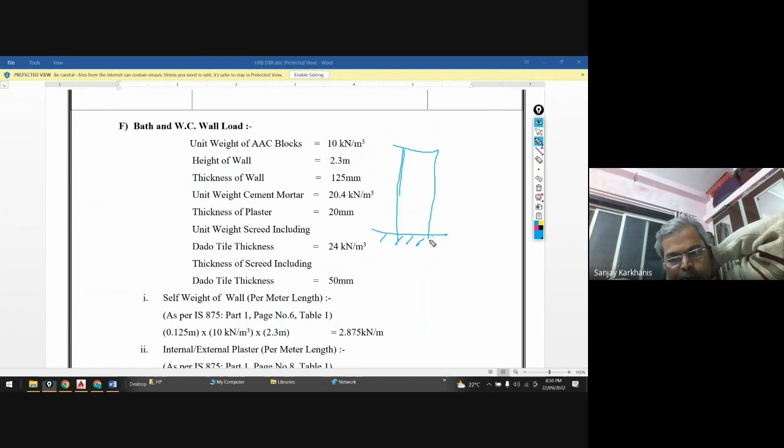Now this structure, for you're using response spectrum method, based on that let's say you're using only 3 modes. So the first mode may be like this, second mode may be something like this, third mode may be something like this. So you are having 1, 2 and 3 modes. Let's say you are analyzing this entire building only for 3 modes, and based on 3 modes you are finding out the earthquake resisting requirements. Now these 3 modes, the building has a mass, let's say m. Now every mode, let's say this first mode is activating only 70% mass, second mode is activating only 5% mass, and third mode, let's say it is activating only 1% mass. Let's say these are your results. So how much does it come out to be? 70 plus 5 plus 1, 76%.

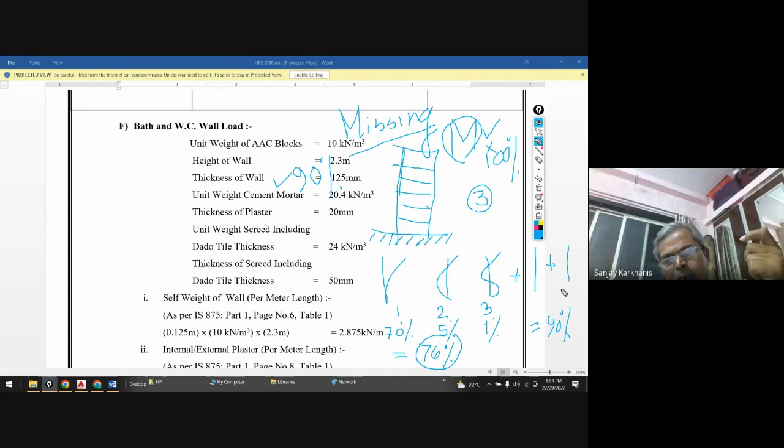So how many modes must you use to carry out your response spectrum modal mass analysis? So this is a modal mass analysis. At least the code says that if you are getting 100% mass, that is very best. But code says you need not go for 100. You can stop your number of modes up to that number where the summation of masses getting activated comes out to be 90%. Clear? Yes, sir.

We'll cover that again when we discuss modal mass participation ratio. Conceptually, code says at least 90% mass participation is required, meaning code allows you 10% mass as missing mass. You don't need to be that accurate, you can go ahead with this, because you will see that as the number of modes goes on increasing, the contribution of mass in that individual mode gets reduced.

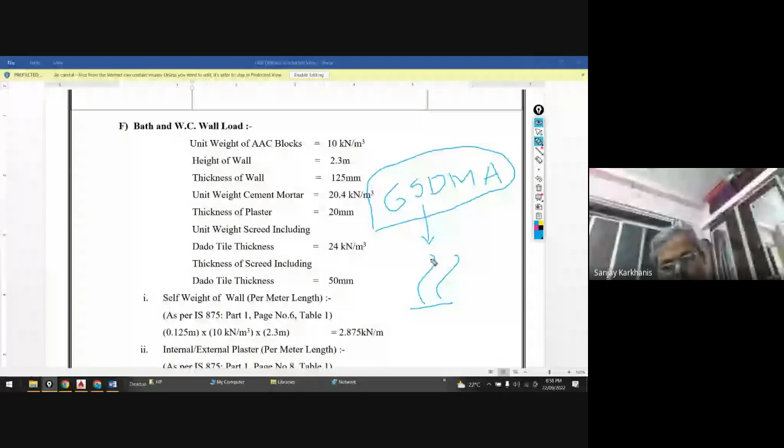A book by C.V.R. Murty - Earthquake Behavior of Residential Buildings, or Earthquake Behavior of Buildings - I gave you that recommendation. Under GSDMA, Gujarat State Disaster Management Authority website, you will find that book with the picture. The book is by Dr. CVR Murty.

He was the head of the committee who revised IS 1893. That revision of IS 1893 in 2016 - the committee had 56 structural engineering experts, structural consultants from all over India, very top rank people, and this chairman recommended the revision in IS 1893 2000, and that has been finalized.